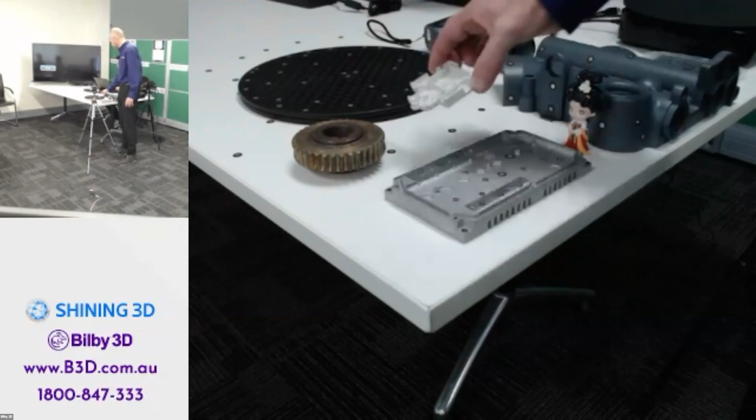So Chris is now showing the scan samples that we are going to scan today. We have some engineering parts, metal parts, and also plastic parts with really high detail. So we'll show you how a Shining3D scanner works with these parts.

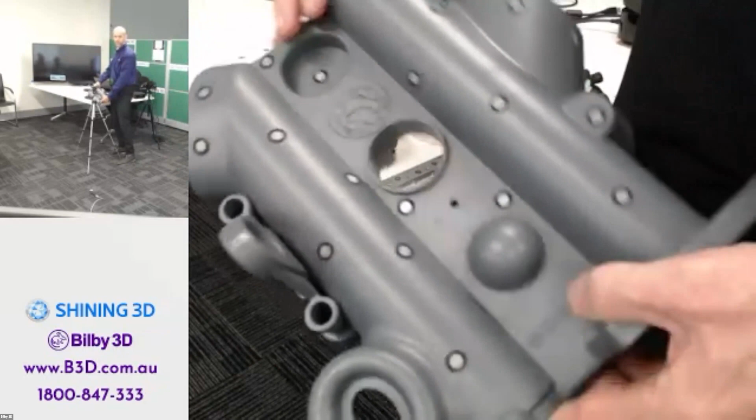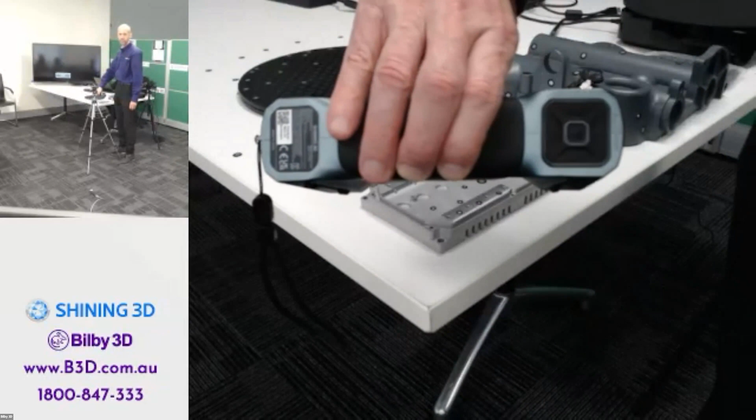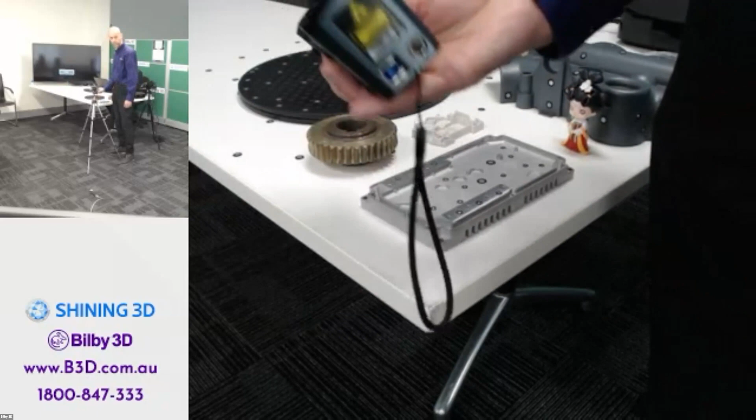And FreeScan Combo, our latest 3D scanner with laser light and infrared light. Maybe later on, a challenge piece, the old pipe bender.

May I know what kind of stuff you are interested to scan? You may share with us, and we can show you the related scanning and application.

So they're Mo, this is Mo. They do performance exhaust. Yeah, so I work for a company called X-Force Performance. I'm a product designer there. We essentially design and manufacture performance exhaust systems for performance cars. We have our factory in China. We design and prototype here in Australia, and we send off to China for final manufacturing.

Are you using any 3D scanner? I am, yeah, I'm using the EinScan HX. It's new to us, but I've used it a handful of times now. What we use the scanner for is, when we bring in a car for research and development, we remove the factory exhaust system. We scan both the under tray, the under chassis of the vehicle, and the exhaust system. We use the parameters such as the exhaust hangers and the exhaust outlets, the connection pipes, where the heat shielding is, to understand the restrictions of where we can create our product essentially. Yeah, that's what we use the scanner for.

Yeah, thanks a lot for sharing. Actually, we have many customers also using Shining3D scanners to do some car parts customization. During my presentation, I will also show a Canadian customer who used EinScan to scan the exhaust of the car, and then they made a customized one. Yeah, that makes a cooler sound. Yeah, it's good. Okay, let's get back to work.

So it seems there are some steps of the basic process of reverse engineering. Three steps in the green area is what we call the forward design. That is a very common and universal way for industrial manufacturing. So you got an idea in mind, you draw the CAD file, and the manufacturer brings it and gets the real object.

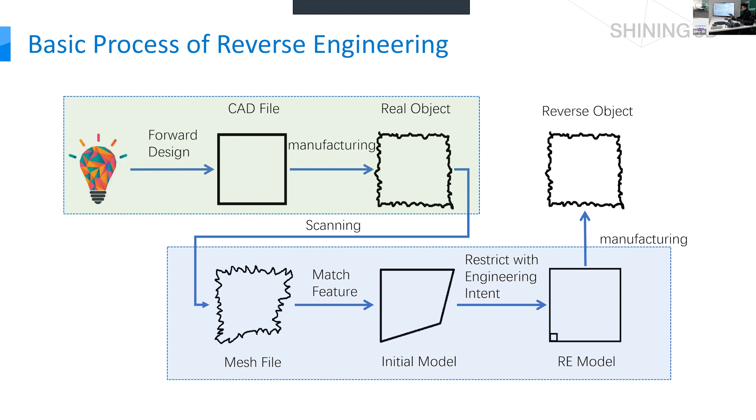So you might ask why we need to use scanners for reverse engineering. The 3D scanners, using the mesh model 3D data as a reference, can improve your working efficiency and accuracy, so you don't have to manually measure all the dimensions.

Especially for difficult, complicated parts, manually doing the measurement will take a lot of time, maybe 1 to 2 days, using calipers to do the measuring, and sometimes it's just not that accurate.

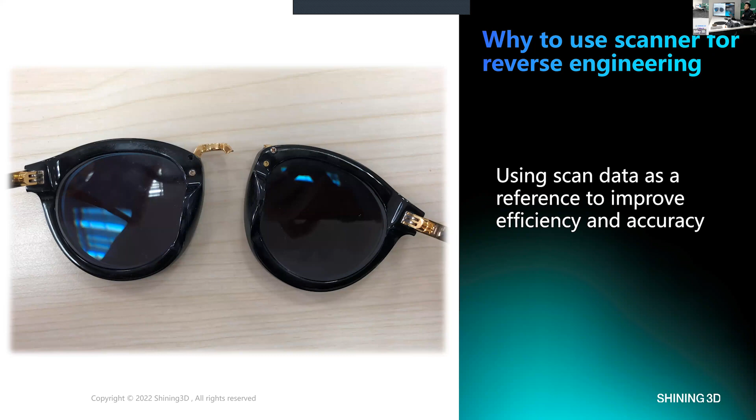So that's the traditional way we do the measurement. Sometimes we just use a caliper and draw the draft based on the measurement, make a test piece, manufacture it, and see if it fits the real object. Then we need to do some modifications, modify the drawing again, and manufacture the test piece again, again and again, until finally you find the work piece fits and can be assembled to other work pieces. Then you get the final work piece, and you can use it for production or something like that.

With reverse engineering, you just need to scan the part and design based on that 3D scan data, then make the test piece. So you don't have to make the test again and again, because the 3D data has very high accuracy and the test piece will fit.

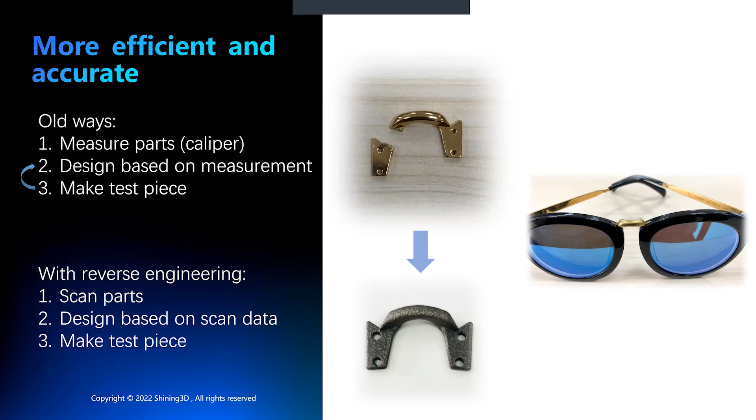Here comes some examples of reverse engineering. Some of our customers are doing car body modification. They scan the original car body shape and then use reverse engineering to design the wide body kit. Here it is.

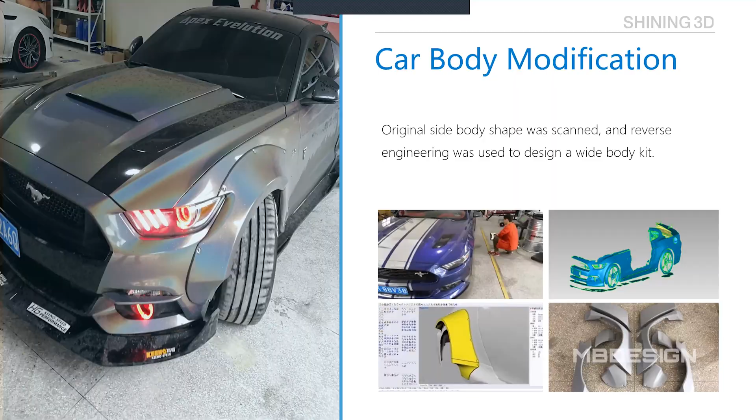There are 4 major steps for reverse engineering. The first, very important step is you need to prepare the raw data, that is the mesh data. Then you need to generate some references, which you can do in SolidEdge or GeoMagic Essentials. Then you do the design work based on those references, and then make the output.

So how to do it with SolidEdge and GeoMagic Essentials. GeoMagic Essentials works like a bridge between the mesh model and CAD format. You can do point cloud and mesh editing, do the alignment, and set the cross section. You can get the cross section lines, and you can best fit some geometry features and extract features, and also do the auto surfacing function to get the NURBS surfacing.

GeoMagic Essentials is a very powerful software. We export the mesh file format, and sometimes it's not compatible with other CAD software. Like Fusion 360 or SolidEdge, you can import a mesh file into that CAD software, but those CAD software are especially for CAD design, so they may not be able to process the 3D mesh file pretty well. GeoMagic Essentials can convert the 3D model mesh file format to CAD format like IGS or STEP files.

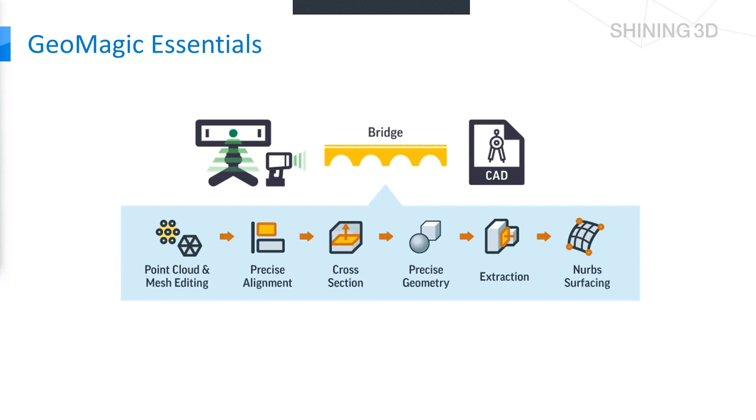So we are going to the first step, prepare the raw data. You can do it in SolidEdge, that's the SolidEdge interface. You can also fix the mesh, align data, and do mesh cleanup in SolidEdge. But I would say SolidEdge software just cannot process the mesh pretty well.

If the mesh file size is below 30 megabytes, SolidEdge might process it pretty well. At 30 to 100 megabytes, SolidEdge may face some lagging issues, which is kind of annoying. If the file size is larger than 100 megabytes, I would suggest doing the mesh repair work in GeoMagic Essentials instead.

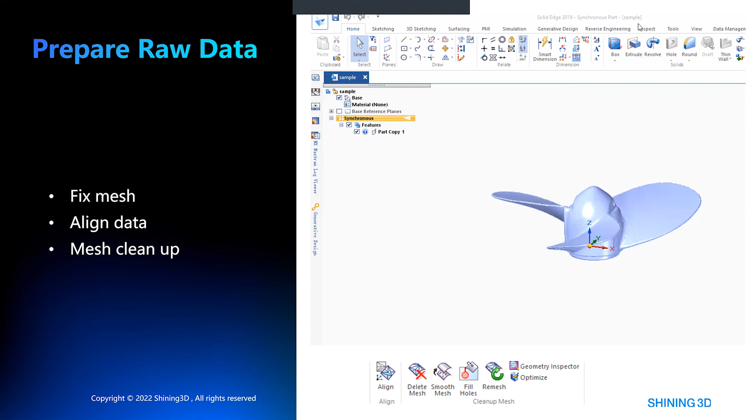So in GeoMagic Essentials, we also provide plenty of functions for mesh repair and fixing. You've got plenty.

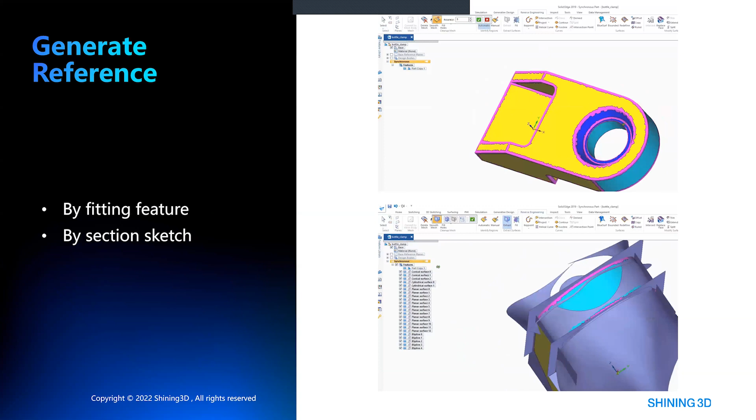Next step is to generate some references. In GeoMagic, in SolidEdge, you can go to the reverse engineering section and use the best fit function to fit all the features. The plane, cylinders, or any other geometry features will be automatically detected by the software, and then you can just click extract the features, and then you've got all the features like this.

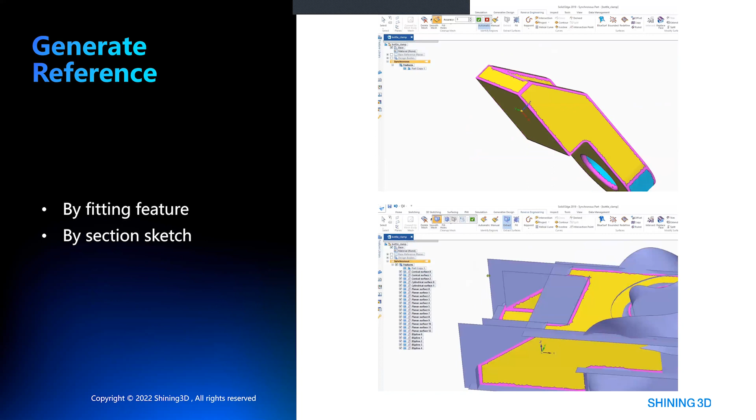And then you can use those features to create a boundary, and then go with the intersect function, and then you've got a solid model.

In GeoMagic Essentials, we also provide functions to create features. These functions can be used for some simple measurement and aligning to the world coordinates. This is also a very important part because sometimes, especially for handheld scanners, you may find the output 3D data is not aligned to the world coordinates. You may find the 3D data is on this side and the world coordinate origin is on the other side, so you need to align them together. Those features can help you align the 3D model to the origin or the world coordinates.

Also in GeoMagic Essentials, you can draw some curves on the scan data and export them as free curves, which can be used for designing a complicated surface, like a fan blade. That shape cannot just be fit by spline surfaces or other models, so you need to manually draw the free curves and divide it into several portions, and then use those curves to create the surfaces that would be the best fit.

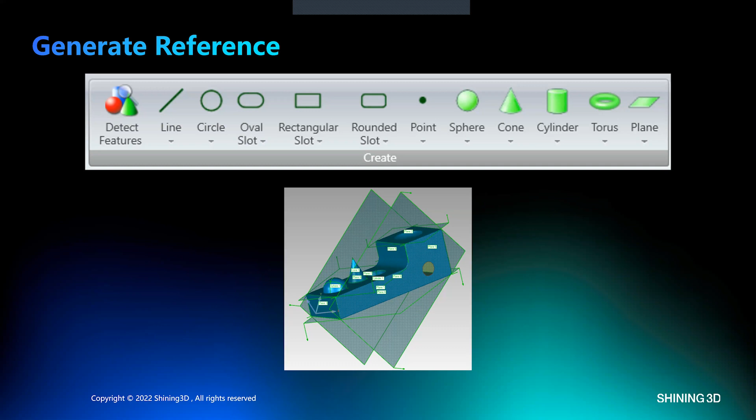You need to manually draw all the free curves, and it might fit pretty well, better than the automatic detection function. So, then design is based on those references. Like I said before, you can extend all the surfaces and use the intersect function to combine all the surfaces into a solid model, just like shown in this video.

Or you can generate features with sketch directly. Sometimes you may find the workpiece is kind of easy, so you can just draw the sketch based on that model directly. I'll show you later.

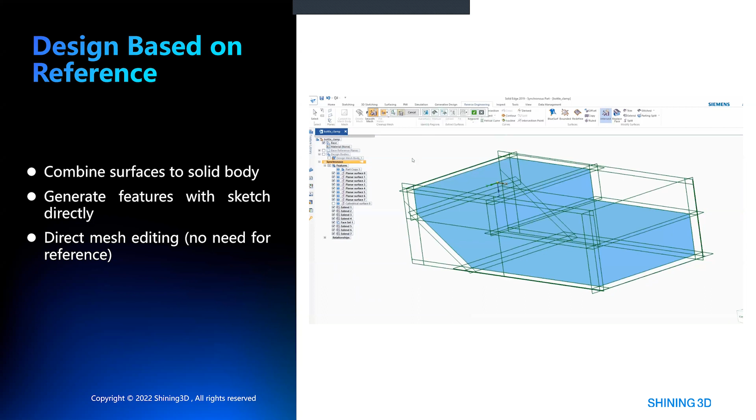And then, another way is to directly do mesh editing. For SolidEdge, it provides a function called convergent modeling, so you're able to edit the mesh directly. You've got the 3D data, and you can make a drill on the data or something like that.

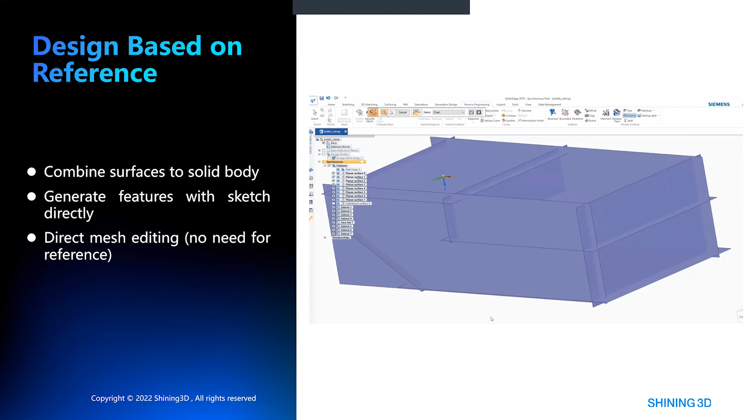This is extending all the planes or features, and then making sure they have an intersection, and then you'll have a boundary. You have all the boundaries, and then you can just use the intersect function here to create a 3D solid model. So the next step is the output.

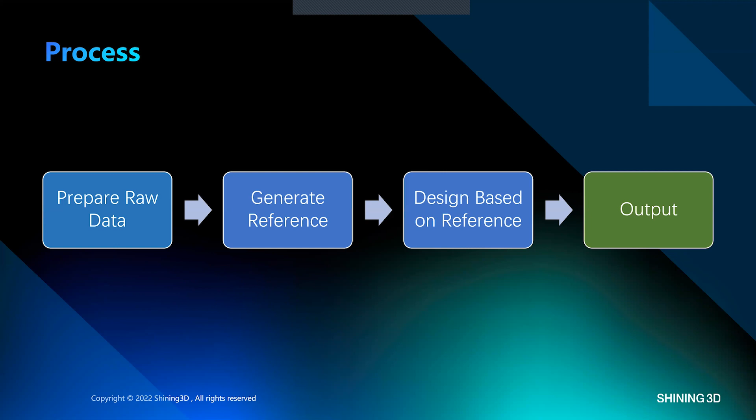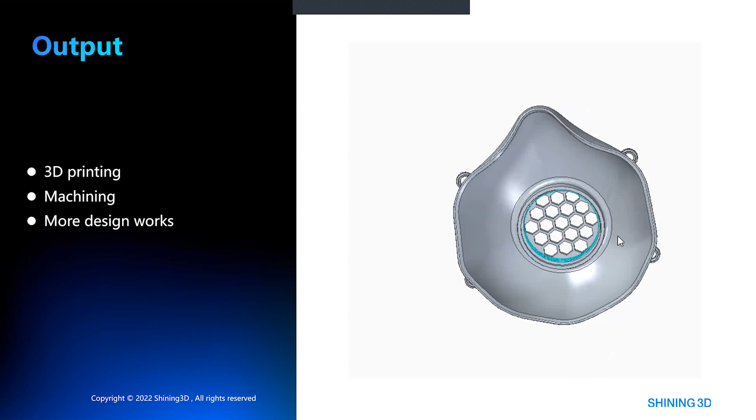The output can be used for 3D printing apparently, and also if you're going to reverse engineer some engineering workpiece, you can do machining, or sometimes you can just use the data to do more customized design work. So I think that's a very brief introduction about the reverse engineering topic. If you guys have any questions, yeah.

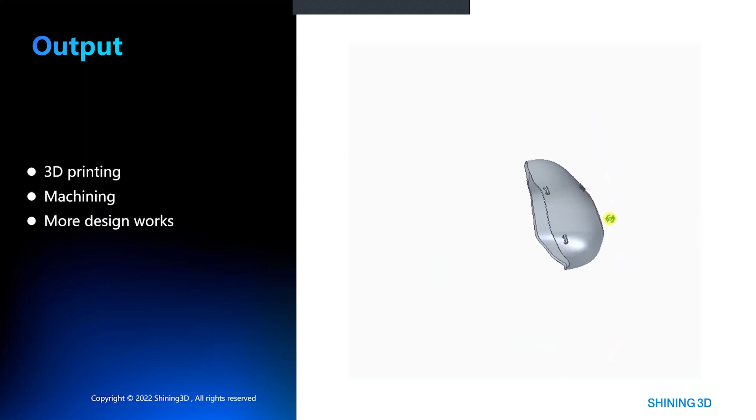So I think you might be very familiar with reverse engineering, right? Reverse engineering. I mean, not really. I don't do reverse engineering much yet.

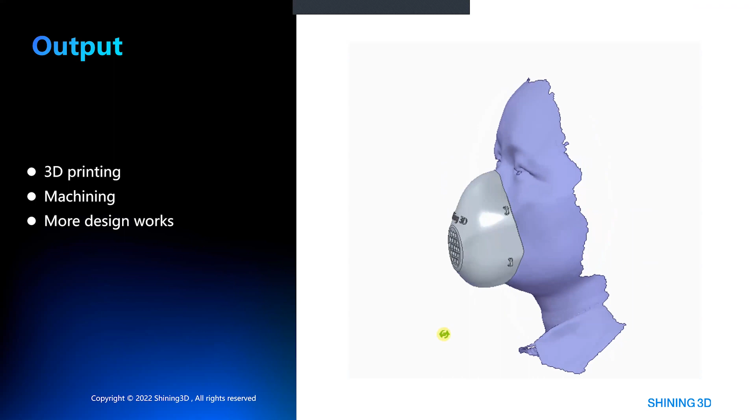Oh, okay. But I think it's because we're creating a lot of new products based off references of existing ones. I see. So I use a mesh file as a reference more than anything. So you just use the mesh file and design the exhaust and make sure it fits to the original, designing around the constraints of the mesh file.

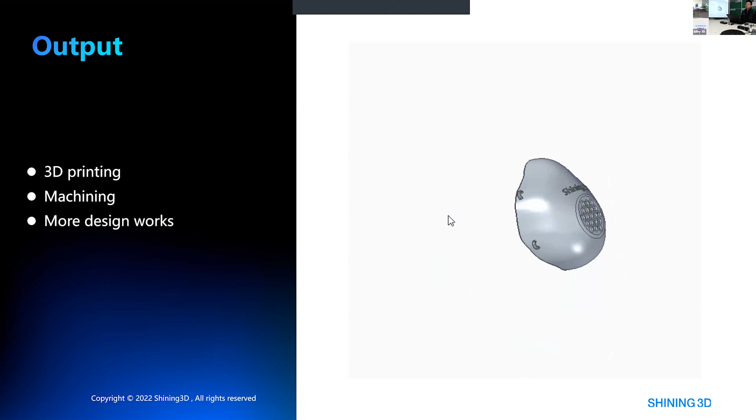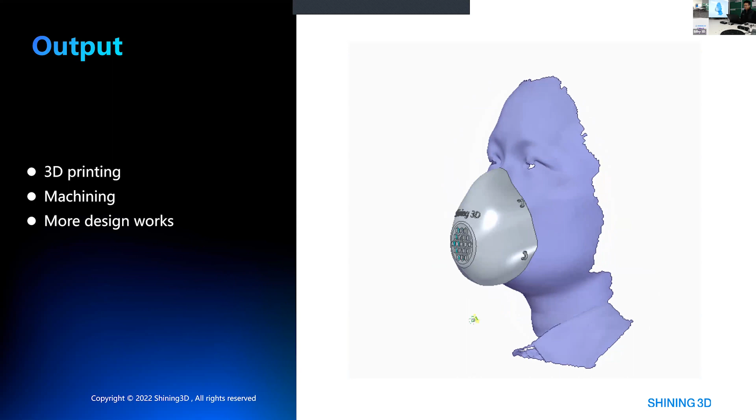I mean, ideally, I would eventually like to reverse engineer an existing system, like an exhaust system, so it can be modified to have the characteristics that I want, to then make a new model based off that. But yeah, I think my knowledge within GeoMagic is really good because it kind of bridges that gap between the scan program and SolidWorks, which I use.

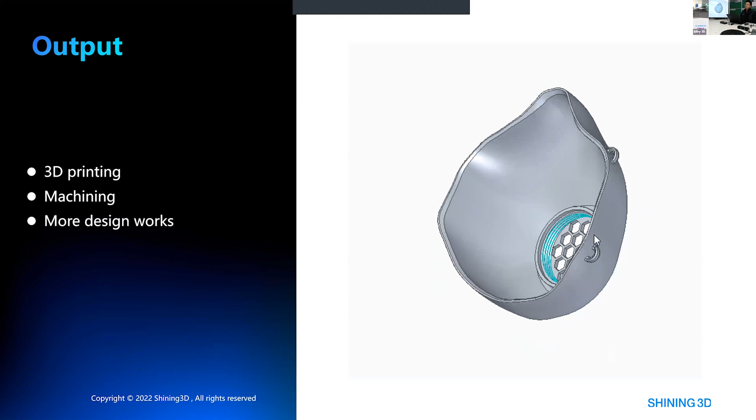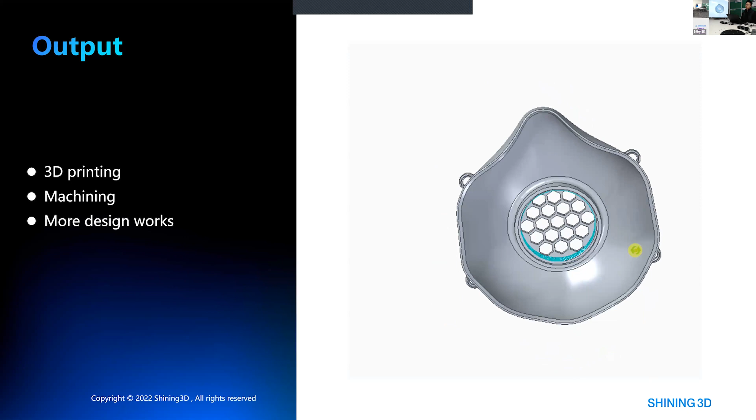Yes. So importing directly from HX to SolidWorks, the mesh files are just completely out of alignment. Yeah, so I use GeoMagic to basically align my mesh file, make sure that it's straight and in proportion, because that's so important. And there's a lot of characteristics in the exhaust system which allow me to do that.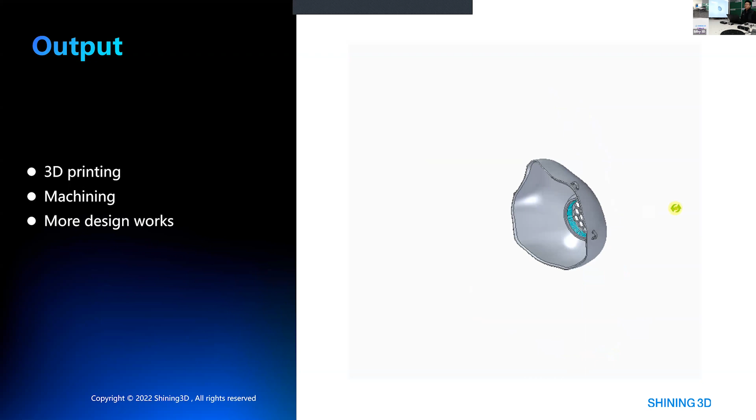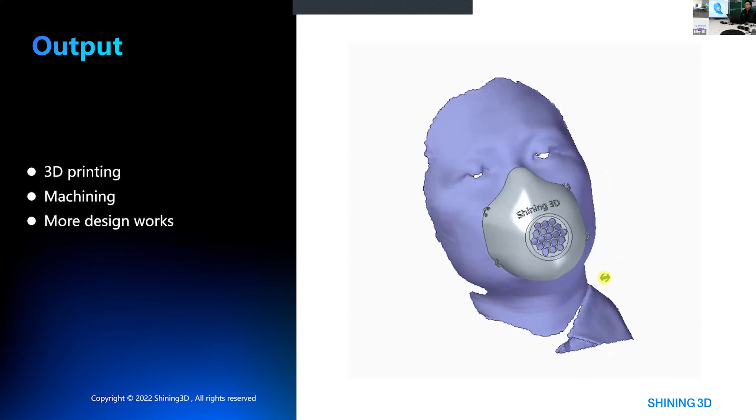So like aligning to world, creating axes, and selecting certain parts to insert models like cylinders and line axes as well. So I've kind of just touched the surface on that front, but I know there's a lot more in it. Yeah, okay, great. So any other questions?